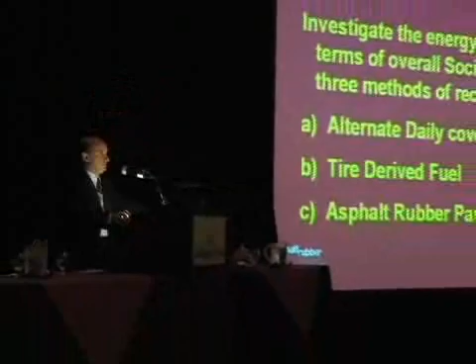So, what was the objective of this paper? It is to present to you some concepts of what energy gets saved to society, not in terms of money, but just energy, if, when we pick up a tire, we decide to use it as alternate daily cover, tire-derived fuel, or decide to use it in asphalt rubber. So the same rubber can have three uses. From the society point of view, how do we save more energy?

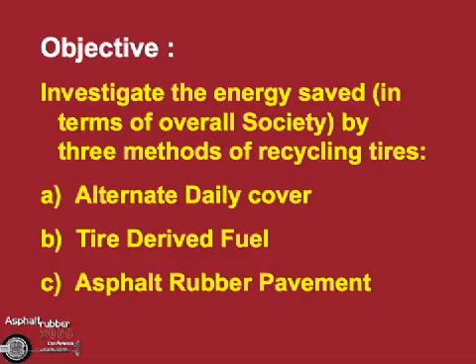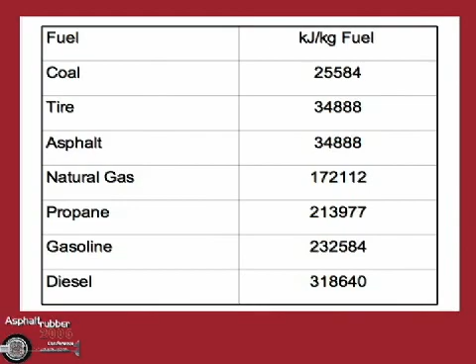So we all know tires, and we use normal information that is currently used. We didn't do any investigation on this part. How much energy is used when we burn coal, tire, asphalt, natural gas, propane, gasoline, diesel, and these are normal numbers that are currently used; they are generic, they are average. So kilojoules spent per kilogram of fuel. These are some of the base data we used.

And we start by looking at the alternate daily cover, where we have the tires, and they are put on the top of the waste disposal dumps to prevent the birds going there and eating all the food, so we put the shredded tires. How much energy do we waste or gain doing this process? So we have the tire shredding process, so we lose about 93 kilojoules per kilogram. We have to shred, we have to transport, and then that's it. So we basically lost energy by doing this process.

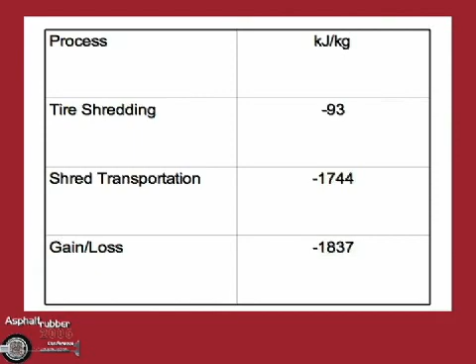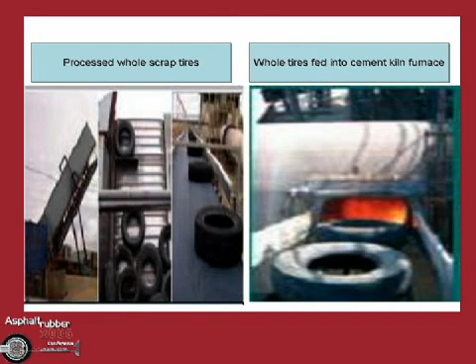What energy do we gain when we use this tire as tire-derived fuel? We basically simplified the process. There are more complex processes, but here we just put whole tires in cement kilns. On average, some are shredded, some are whole tires. So we consider some shredding energy, some transportation energy, and some benefit from energy that we gain back from the tire that was burned. So we gained 31,000 kilojoules per kilogram in this process. So it's better than just using it as daily cover.

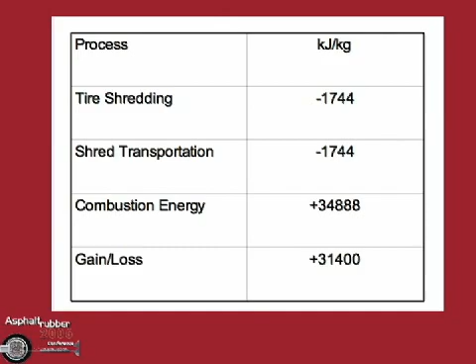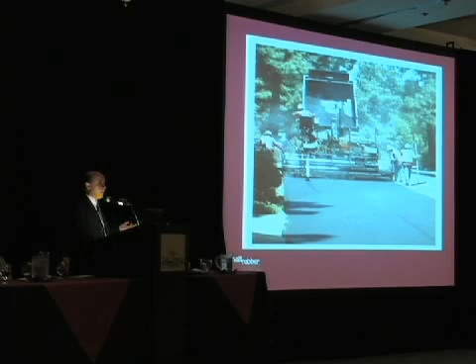Now, what happens when you do it in pavements? We have to create crumb rubber, we have to pave it, and here what we end up considering is the fact that we are now using the Caltrans equivalency factor of 2:1. When we use asphalt rubber in a pavement, we're basically saving the energy corresponding to half of the thickness of the pavement. But there's still some energy lost.

We spend energy in tire shredding, transportation. Now we have extra energy costs in granulation. We have to make it fine. Then we have to transport the crumb rubber. We gain by steel recovery. We gain in asphalt saved. We gain in aggregate saved. And here when they say saved, it is the transportation costs of moving aggregate, heating aggregate, blending aggregate. All that energy has been quantified.

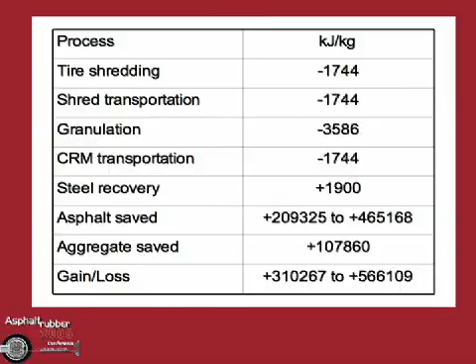So by the time we finish with this process, when we use 1 kilogram of crumb rubber in the asphalt rubber, and assuming, this is the assumption behind this analysis, the 2:1 reduction that is accepted by Caltrans, we basically gain about 310,000 to 566,000 kilojoules per kilogram. This range considers the fact that in Arizona, asphalt rubber is used in open grades, and there is an extra benefit. So the left column there, the 310, is for the California approach, and the 566 is for the Arizona approach of using crumb rubber in open graded.

So the first thing we have to think now is, okay, we have all this crumb rubber. What do we gain by using it one way or another? So, in comparison, if we use it in alternate daily cover, we don't gain much. We just bury it, and we waste money burying it. Tire-derived fuel, yes, we gain some, but it's 10 to 1, sometimes 20 to 1 benefit if we decide to use all our crumb rubber, not to be burned, but from society's point of view, to use it in asphalt rubber.

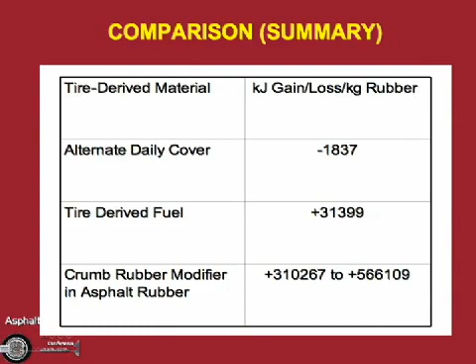Now, this energy will have to come from some place. If we don't use it from the rubber, it has to come from some place. If we don't use crumb rubber, we're going to use some other alternative, and we have to burn fuel, we have to go nuclear, do something to get the energy if we want to do pavements. Now, another way of looking at this is, again, for US values, again using the 2-inch to 4-inch reduction accepted by Caltrans.

And sorry, I didn't convert these to kilojoules, but BTUs per pound of crumb rubber, this is how much we save in the process. Now, if we know how much crumb rubber we can use per mile, how much BTUs we save per mile, we can determine, from the energy in 1 gallon of gasoline, how much BTU we save. So we can convert how many gallons of gasoline correspond to the energy that we save by using asphalt rubber in 1 mile of road.

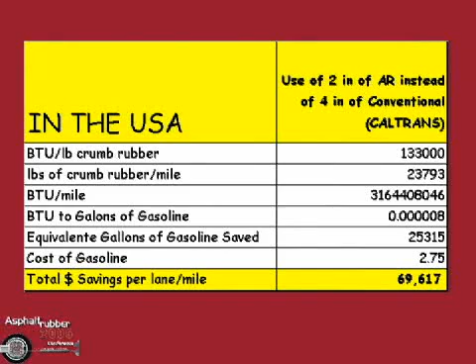And just to give you a feeling of what that means, because we don't usually talk BTUs, it's not the language we understand; we understand dollars. So the energy we save in one lane mile of using asphalt rubber corresponds to about $69,000, assuming the cost of gasoline is $2.75. Now, it's gone up, sometimes 2, 3, but assuming $2.75 per 1 mile.

I want you to get the feeling of it. 1 mile, 1 lane of asphalt rubber use is $69,000. It's like enough to put someone through college. You can decide if you want to have education or you want to have conventional pavements. Now, this is one way of looking at it. Now, if you multiply this by all the lane miles, you see the numbers are staggering, okay?

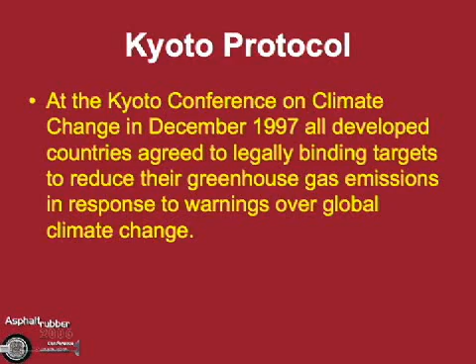Now, I know this is US, we don't go by the Kyoto Protocol, but 140 other countries in the world go, and it's interesting to know what's out there. And they have determined that there are limits for the CO2 greenhouse emissions, and they try to bring everything back to some year before, I think it was 1990. And this will condition how much development we can have, where we can have it, and if we are willing to pay for it, because we must limit CO2 emissions.

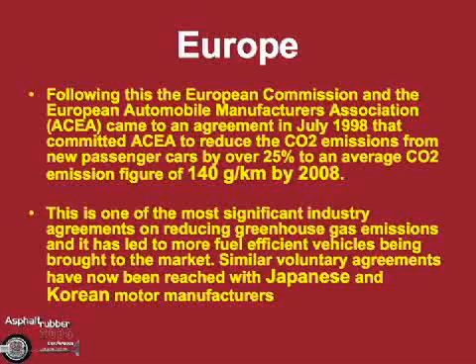Now, to give you a feeling of how important this is, in Europe, the European Automobile Manufacturers Association has agreed that by 2008, all cars will only emit 140 grams per kilometer of CO2 emissions. Now, the Japanese went along, the Koreans went along; obviously, the US doesn't abide by Kyoto, so here we don't have laws about that. But obviously, as you know, Schwarzenegger is very strong on trying to reduce emissions too, but not through this process.

Now, if we assume, and this is, again, an assumption that I made for the paper, which may not be too far from reality, that the gallons of gasoline saved are used in a car, and that car emits 2.4 kilos of CO2 per liter, and these are normal numbers, then, per lane mile, if we use asphalt rubber, we are saving 146 tons of CO2.

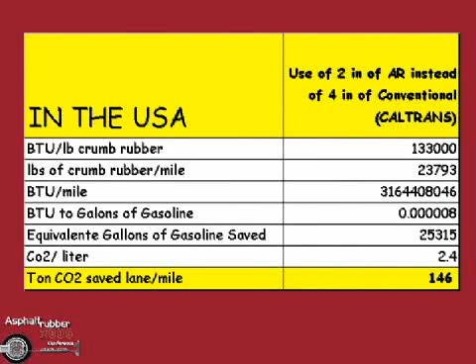I repeat, instead of using the conventional 4 inches, if you use 2 inches, and assuming that the BTU savings correspond to savings from gasoline use, obviously in reality the trucks use diesel, and there are some other processes, but just to give you a ballpark figure, it's not going to be too far, but it's not the real number, then we'll be saving 146 tons per mile of CO2. Now, you don't get excited, what's 146 tons per mile of CO2? I don't know. So, again, I made an effort here to convert this into something you know.

Now, outside the United States, there are agencies that buy certificates. For each ton of CO2 you can save, you can sell those certificates for about $30 a ton. So saving of CO2 in the world is now valued at about $30 a ton. This is a number in the market.

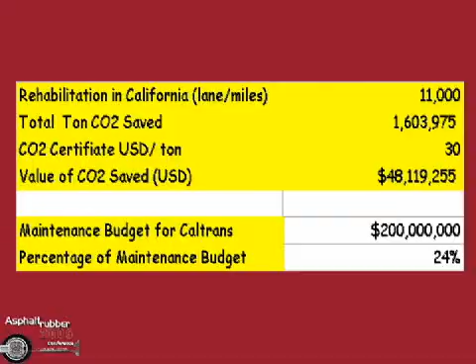Now, let's see what happens just in California if we would go by the Kyoto treatment, and asphalt rubber is a strategy that is recognized as saving energy. There are 2 ifs here. And we are rehabilitating California's 11,000 lane miles. This is a number that is current in California. Each year, we rehabilitate about 11,000 lane miles. Then we'd save about 1.6 million tons of CO2. The going rate of CO2 tons is $30. So we'd be saving $48 million.

Now, what is $48 million? In terms of California budget, they have $200 million to maintain roads, sometimes $150 million. So we are talking here about something that is worth about 1/4 to 1/3 of the maintenance budget of California, just in the value of CO2 emissions.

Now, see this at the scale of a country like Brazil that decides to embark on asphalt rubber use. If you go by the Kyoto treatment, I don't know how many miles of roads you maintain in Brazil, but it's probably a little more than 11,000 miles. The amount of savings to the country that you can then sell to the international market in CO2 certificates is huge. And I think this mechanism of converting the energy saved by the use of a pound of rubber into CO2 emissions would be the driving force, far more than anything else, to introduce asphalt rubber all over the world.

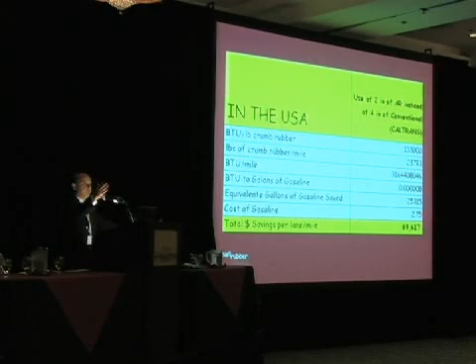Ali Salim, South Dakota State University. Would you come to the same conclusion if instead of putting 4 inches of asphalt mat, we put 2 inches, and just take the unit price of the aggregate and the binder and whatnot and go to the dollar values right away instead of going to the BTUs and kilojoules? Would you come up with the same conclusion?

I don't know, but I didn't want to go through that process because I wanted to make sure this has nothing to do with the actual cost, because the cost of bitumen goes up and down, the cost of gasoline goes up and down. The only reason I bring in a cost is to give you a feeling of the importance of the BTU saving in something we can all understand. Because if I just come here and say, well, we saved 31,000 million BTUs per mile, you look at me and say, what is this? So I had to come down to numbers. That's why I converted it into dollars.

But obviously, the important thing is the big number of how much energy we are saving per mile. I'm just converting it to dollars to give you a feeling of the importance of these at current costs of energy for gasoline, for instance, which is not the most expensive one. But this is the energy we are saving. That's the important one. And obviously the next important one is the tons of CO2. 1 million tons of CO2 saved in California per year if all the roads were converted using this concept. So these are the important numbers. When I convert them into dollars, it is so we see the relative importance of these huge numbers.